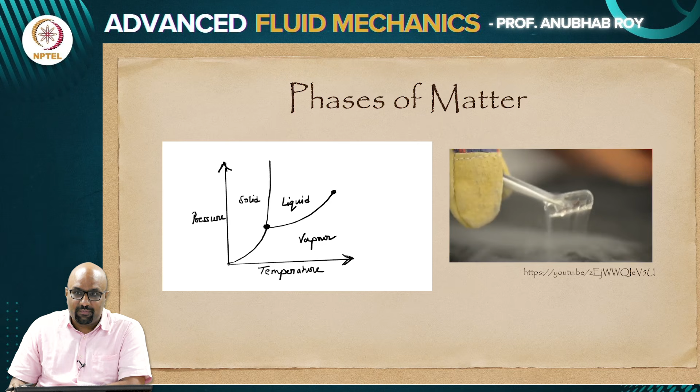What you see on the video here is a video of argon which is solidified, and in room temperature it exists in the gaseous phase. As you see, there is a rapid melting of argon happening here, melting into the liquid state, which instantaneously turns into the gaseous phase.

Now if you think in terms of how we think of these things at the molecular level, because all of these things at the fundamental level are made up of atoms and molecules, at the molecular level I have to think in terms of what solids, liquids, and the vapor state would be.

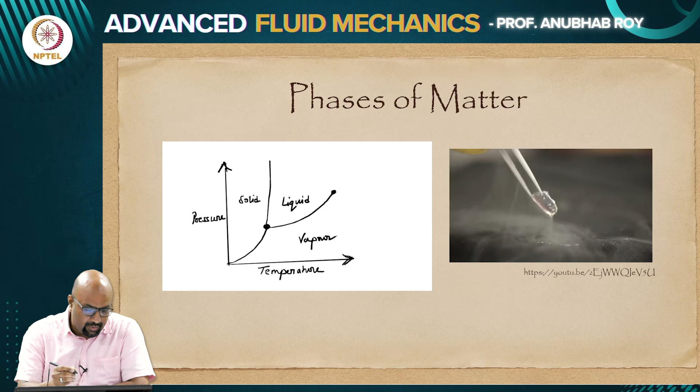The solid state would actually consist of the individual molecules being stacked up in a very orderly manner, and we will soon try to make this a little more precise what I mean by order. So you will see them in this nice orderly manner for a solid.

In the vapor phase, there would be the least amount of order in the system. The molecules would not be in any organized manner spatially, whereas liquids would be somewhere in between. They would not be as precisely arranged as in solids, and they would also not be as disordered as you think of in terms of gases.

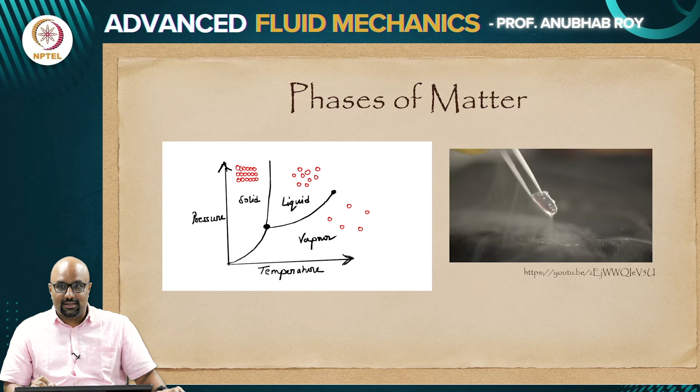If you had to quantify this fact of how ordered the phase actually is, and this is again purely thinking of the static scenario, no force has been applied on the system. We are just looking at the static state and trying to see if we can distinguish between these phases of matter based on how the individual molecules are arranged.

Let us say, just to make things easy, I have 5 molecules and you start to connect these molecules. You say that I am going to join these molecules, and these are the distances, the 4 distances between, let us say, this particular tagged molecule which I label as 1.

Similarly, for the second molecule you could do the same, and you would have another 4 distances for the second molecule, and you can repeat this process to actually form all the possible distances between these sets of molecules. So what you are trying to do is find the pair distances between these molecules.

And you can ask the question, what is the frequency of these pair distances? How frequently would your neighbor be placed at a certain distance?

So if you ask this question for a gas, say that I am placing myself at the origin, which is one single gas molecule, and where would your neighbor be? Now in a gas molecule, the size is d.

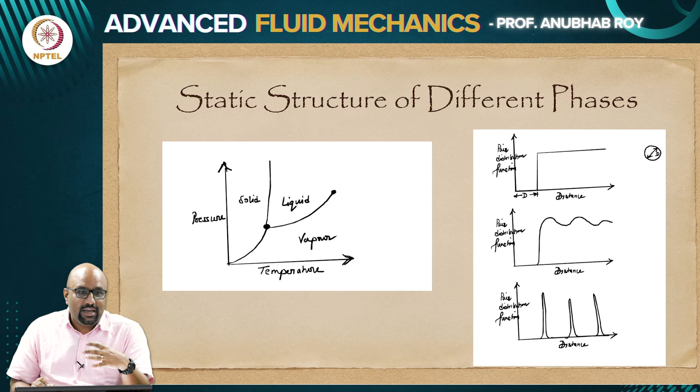Now why does it end up being this way? Why does it actually choose to arrange itself like this? To see that, we need to think in terms of interactions - what would be the energy of interaction between these molecules to be in these particular states.

For the gas phase, where neighbors could be anywhere with equal probability, there is no energy of interaction in terms of distance unless you are exactly overlapping. You are moving around like a billiard ball, until you go and hit - there is absolutely no interaction energy between the two molecules. They move around freely. Only at the instant of collision do you realize you cannot penetrate through the other molecule, so you rebound.

So you have an infinite potential energy barrier to overcome if it was exactly a hard sphere kind of collision. Real materials will not be that way - not like a rigid billiard ball. You can get closer and closer, but there is a penalty for getting closer. So this curve basically becomes softer as you think of a real material.

There will be short range repulsion - you cannot penetrate through the other molecule, but it's not going to be an exact jump. There is also a long range attraction, which comes from what is known as van der Waals, as one example. If these molecules have dipoles, dipole-dipole interaction leads to a net attractive interaction which is significantly long range. So if you are very far apart, there is van der Waals attraction, but when approaching each other, there is a repulsion.

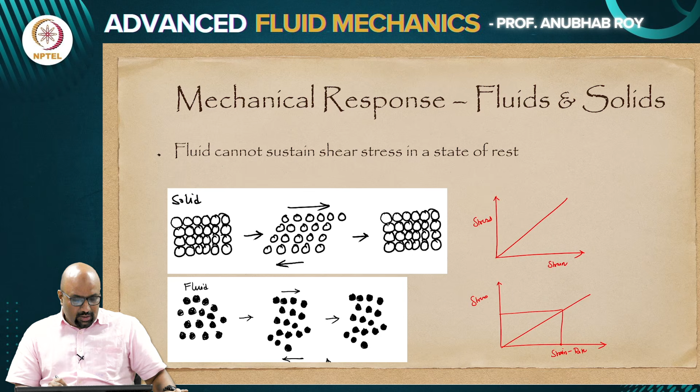So there are various examples, but one which is quite fascinating is an experiment which is now close to 100 years old, at the University of Queensland in Australia. It's called the pitch drop experiment. Very simple setup, nothing fancy about what this experiment is trying to do. All of you would have seen or be familiar with pitch, which comes from coal tar. When you see roads being laid, pitch is that very thick, gooey, viscous liquid that is there. So you have a funnel in which hot pitch is poured.

Then initially when you pour it, there was this kind of bulbous neck that formed. They cut this neck, and gradually as you cut the neck, a drop starts to form. And if you wait long enough, just like any other drop that you might have seen, it will grow in size because due to gravity it is trying to fall, it will grow in size, disconnect, and fall.

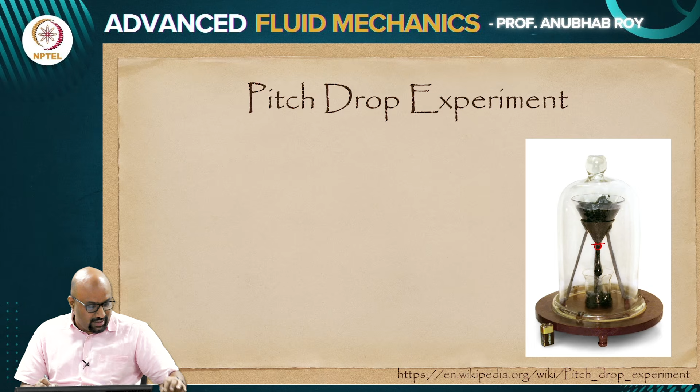Now, the question, or what the experiment has managed to do by being probably the most boring yet still giving such insightful answers, is if you look at the time stamp of when these drops started to fall. The pitch was poured in 1920 or 1927, so you can see the time scales. Three years later they cut the stem. The first drop fell in 1938, which is 8 years later. Then in '47, again around 8 years later, it went on, and the most recent drop fell in 2014, separated by around 13 years from the previous drop, which means you are expecting the next one to fall sometime soon.

The point is that for you to see a fluid-like response, which is just a drop falling off, you need to wait more than a decade. So the key question or key idea is about the time scales of your observation.

Would you see a response? If you were making observations for this setup over a few seconds, hours, days, or even a year, you would be tempted to think of this more like a solid. It's only when you have waited long enough that you actually start seeing a fluid-like response.

Another couple of examples where you see these are glaciers, also known as rivers of ice. If you were to just observe a glacier, you would not think of it as a fluid-like medium. You would just think of it as a collection of frozen stuff sitting out there. But we all know that glaciers do flow, and the classic example is to collect observations showing the front at which the glacier moves. There are a lot of sped-up videos which show the motion of glaciers. So again, it's a question of whether you have waited long enough to make your observations.

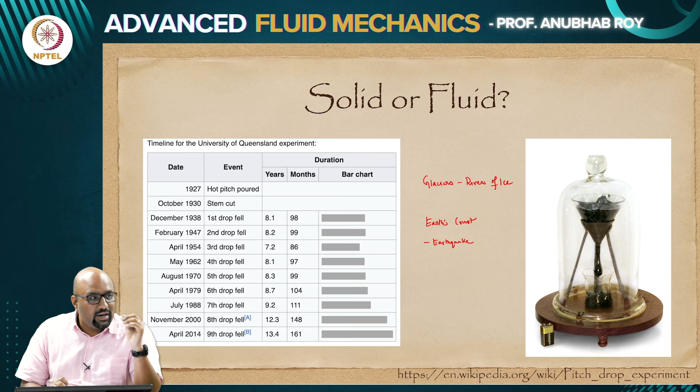Even though we are not going to go into detail trying to understand what would happen with this same glass of water—would it behave like a solid, would it just be a glass of liquid water, would it actually have a solid-like response—we are not going to look into that kind of deviation. But it is important to understand that those deviations will exist. So how do we basically understand those deviations?

This brings in another key idea to study fluid mechanics, which is the continuum hypothesis. I want to understand what are the relevant, or smallest, length and time scales that are there in the problem. If I just take the example of gas, it's easier to do this for gas. The picture can be extended for liquids, but it gets a little more involved.

In gases, when a gas molecule is moving, it just moves with abandon, there is no interaction—I am taking the ideal gas problem. Ideal gas problem means there is no interaction; they just move freely in space until they go and bounce into another gas molecule. This gives us an idea of what is known as the mean free path.

The mean free path can be found for gas molecules based on the concentration, the ambient temperature, etc. Typically at standard room temperature, if you work out what would be the mean free path of air, that would be around 100 nanometers. That is a reasonable estimate of the mean free path—the distance it travels.

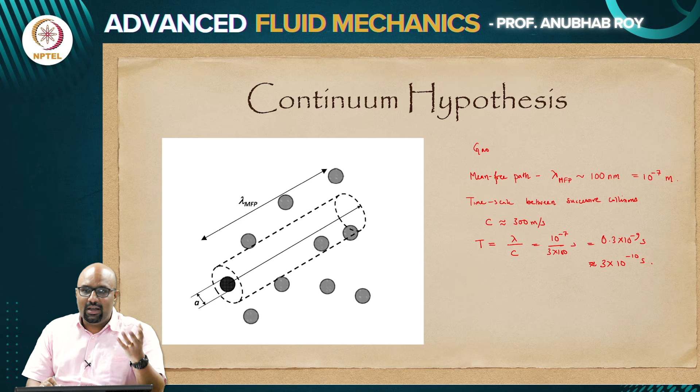So why is there a need for actually doing this class of continuum calculations? What is it that we mean? Why are we trying to talk about this continuum? This is an important idea to keep in mind, because it is a hypothesis which we are going to work with, and you will see where it becomes invalid.

So the starting point again, if I take for a gas - if I say that I have 1 mole of gas, which is around 22 liters, or 22 into 10 to the power 3 centimeter cube is what I have as 1 mole of gas. This is going to have an Avogadro number of molecules. So automatically you see that a liter of gas has 10 to the power 23 molecules.

So the first question is the ease of calculation - if I want to take a liter of gas and compute various things for that liter of gas, you need to individually track these 10 to the power 23 molecules and solve for their equations of motion and then try to get something meaningful. So your question is, do we really need the information for all the 10 to the power 23 molecules? And the second part is, is it feasible to do it?

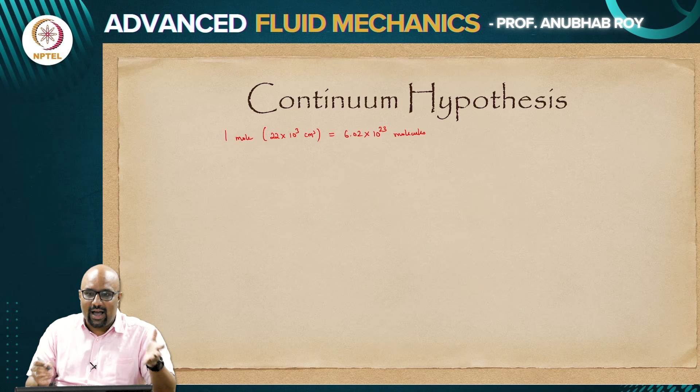So the feasibility is impossible. If you have to track 10 to the power 23 molecules individually and solve for them, that is beyond the capacity of what you would be able to do with most accessible computers. And thankfully, we don't really require information of all these individual molecules.

So we are in a soup because we can't handle so many molecules, but we are in some sense saved by the fact that we are also not interested in what a particular individual molecule is doing in this room. I am interested in what would be the density of air in this room, what is the temperature, what is the pressure felt by the walls due to the air in the room. If I am designing air conditioning, what would be the flow rate of air passing through. I am not trying to track individual molecules. So this is where we are at an advantage, that we are not looking at individual molecules.

But then this brings about that if I am making measurements, let us say measurements of density, where do I know that when I give you a value of density using rho, at a point in space, at an instant in time, using the word point? If at a point I give you a value of density, let us say 1 kg per meter cube, what does it mean by saying it is at a particular point?

Because if at a particular point mathematically, there may be a molecule, there may not be a molecule. If I use it in the strictest mathematical sense, defining a point as a point, there is always a chance that a molecule may pass through it or may not pass through it. But we do not mean it in that particular mathematical sense.

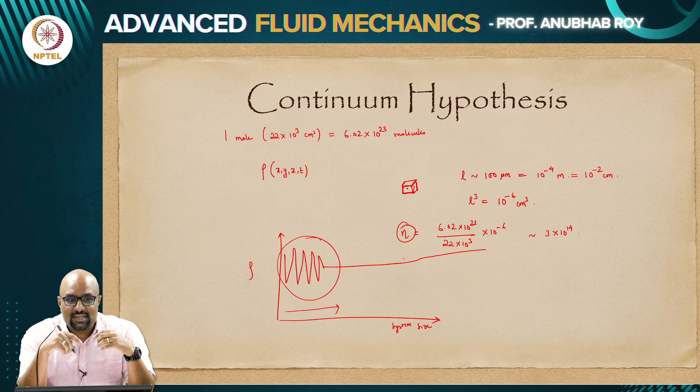So we will define all quantities to be uniformly defined at every point in space at every instant in time. Even though we know that truly speaking, at a given point in space mathematically, there may be a molecule of water, or there may not be. But we are not looking at such small system sizes. At the scales at which we are making measurements, we have enough number of molecules that we can define a mean or field quantity of velocities, pressure, density, temperature, all quantities. This is primarily what constitutes a key part of what we do as the continuum hypothesis.

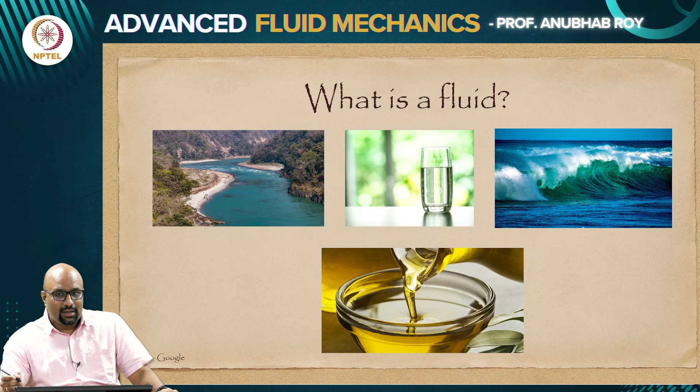Going back to the question we had, what do we think of as fluid? I gave various examples trying to justify how we think of fluids, based on their static structure, based on their mechanical response, and then trying to make sense that if we have sufficiently large numbers of them, we can also define various field quantities. But can this idea be extended to things which are completely out of the box in terms of what we think of as fluids?

If you think of sand, which is probably more relatable, you can have sand dunes which flow quite similar to how you would see flow of other fluid-like material. Another example would be mud, which is again made up of things you can see visually. Molecules of water or gas you are not able to see with the naked eye, but grains of sand, mud particles, you are able to actually see in most cases with the naked eye. So the flow that you observe is quite similar to the flow of a liquid.

Then at the bottom you have what is a sandstorm. The sandstorm, when you are looking at it, is basically dust that is moving, behaving like a fluid, even though it is made up of individual dust particles.

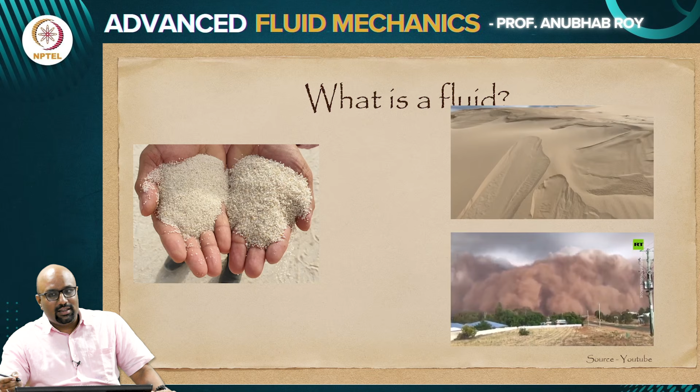You can also think of these as examples related to passive particles, because these are all sand grains or dust particles - everything is passive, being swept around by some mechanical forcing. There is wind or something that is blowing them around, and you see them in such a manner.

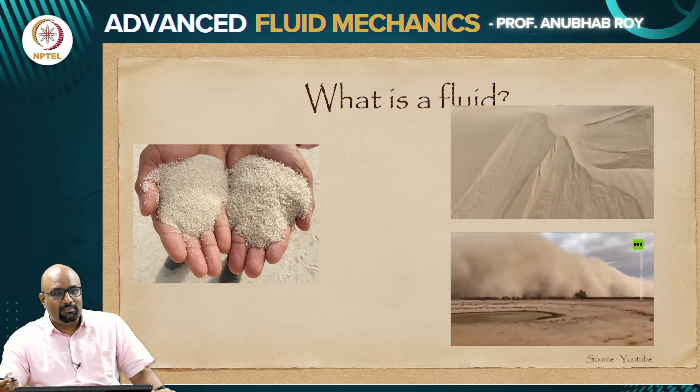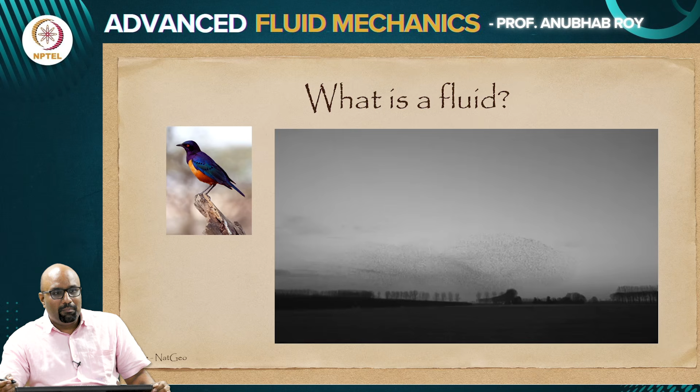Now this is the example of starlings. You have these birds forming flocks, and when you observe their motion, they form patterns, they form large scale orders, which is not something you would be able to identify from an individual bird. So the collection of these objects - and when I say objects, I am thinking of them more as objects which can actively move around - they create patterns that are more reminiscent of what you would think of happening in fluids.

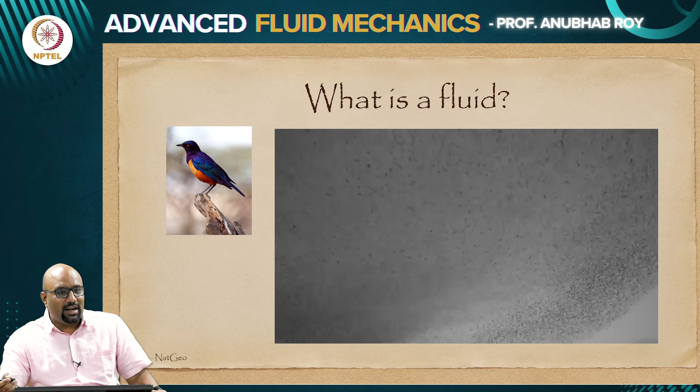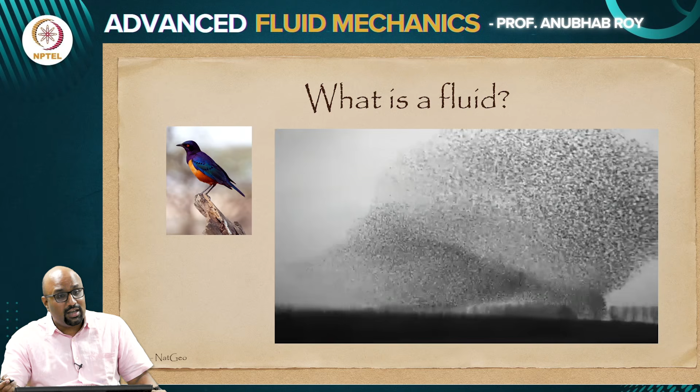And the sound, known as murmuration, individual birds are basically making this sound, and you see this beautiful pattern that emerges there. At the underlying level, the question that interests many is, can you model it as a fluid? Can you model it based on how we think of a continuum? Can you think of this as a continuum system? The same question applies for motion at very small scale.

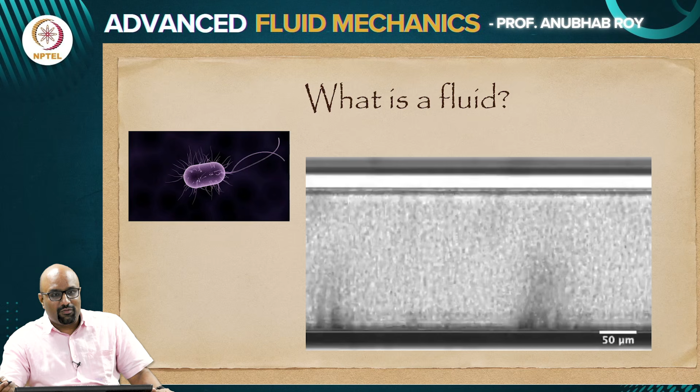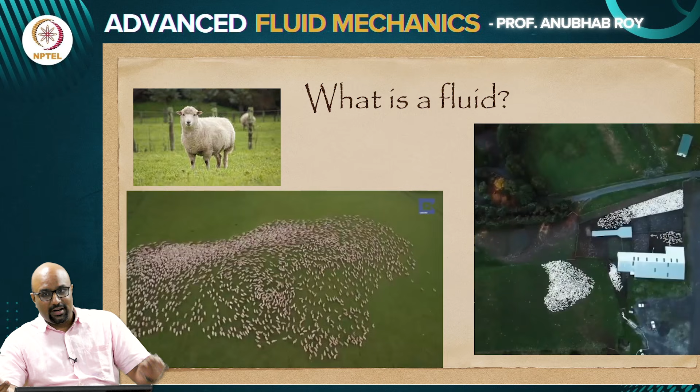field quantities in such a problem. This is the example for the sheep thing that I mentioned, very different from what we think of in terms of fluid molecules, but when you have these moving around in a flock, in a herd, there is a certain sense of fluidity in them. That motivates the question of the underlying principles we learn in terms of how we relate motion to internal stress, and how stress is related to deformation. If you see the second video from a distance, not paying attention to the individual entity, it almost looks like a blob of fluid doing its own thing.

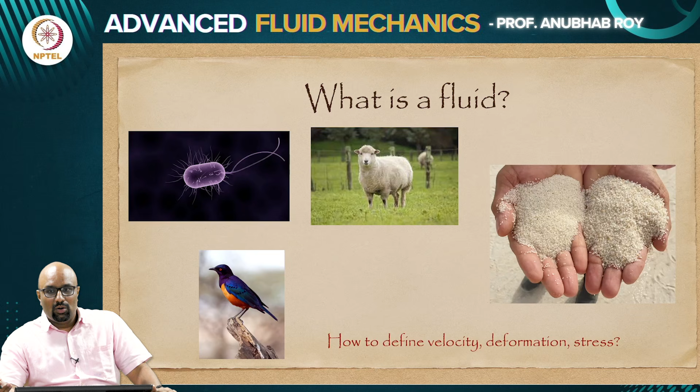So this is broadly the tools that are applicable to whatever we learn. Going forward we are going to focus primarily on fluids as we understand things like water and air, but the principles we develop to understand the motion of fluid can be applied to significantly different systems. So with that I will stop, and I think I can take questions.

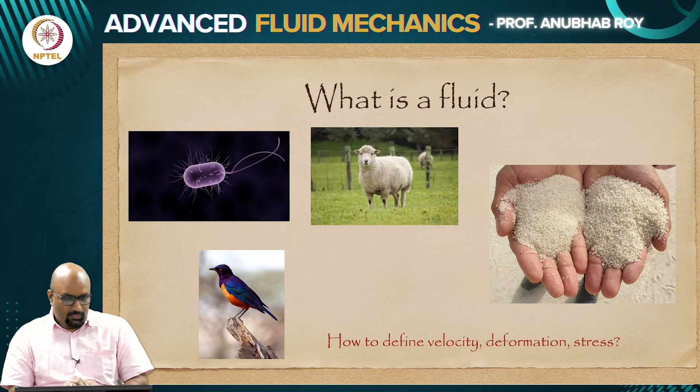On that page where you were describing the potential and thermal energy, can you just... U naught, U naught, this is just the depth of that well.

So you have a repulsive part. The force that you experience is the slope of this curve. This is the potential energy. So you have a repulsive force because the curve is going up, that's your repulsive arm. This part is repulsive, and this arm, which is increasing with distance, is attractive because the slope has the opposite sign. So this creates a well here, and the depth of that well is U naught.

And what you are doing now is comparing the depth of that well with the thermal energy, because if your thermal energy was larger than the well, that means you are somewhere here. That's the thermal energy that you have in the system. So you already have inherently this much amount of thermal energy due to your own motion. The temperature leads to fluctuation and you have kBT energy. So you are never going to access the attractive zone. You will not feel the long range attraction if your thermal energy is larger than U naught. Only when your thermal energy is lower than U naught do you realize there is a possibility to also experience the attractive interaction if you are far apart. So comparing the two scales helps you understand what state of matter it would be.

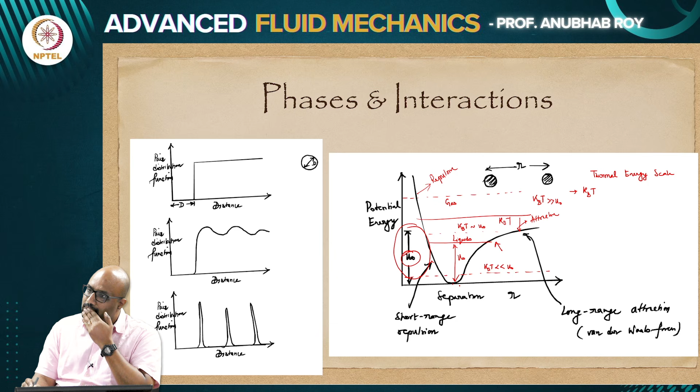So if you say that I am measuring density, think of density as counting. The example I always give is like if I want to find out the number of students per square meter in a classroom. Right now let's say there are 20 students in this classroom.

Now if you take this example of a classroom, the moment we all disperse, there will be no students in this class. So whatever I measure as the number of students per square meter in this classroom is going to be 0 at that instant. At the next instant when somebody steps in, you will have a large number.

Now think that you are going to measure this over the entire area. This room might be empty, but the adjacent room might have someone. So you are going to have less fluctuation when the measurement volume, the control volume, is becoming larger in size.

When you have very small control volumes, if you are trying to do just a counting, then you may find a molecule, you may not find a molecule. You might find 4 molecules at some instant of time, you might find 0 molecules, you might find 1 molecule, which is why that fluctuation becomes very severe when the system size becomes small.

But when the system size becomes large, over 10 to the power 23, plus 4 minus 4, plus 400 minus 400, plus a billion minus a billion, it means a small fraction. The whole point is that the number you have for 1 mole of any system, any material, is 10 to the power 23.